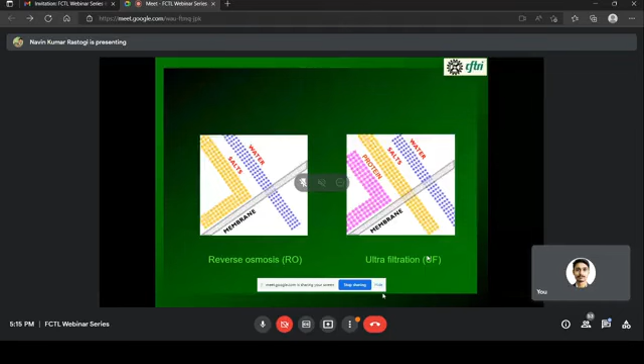Now it is fine, sir. You can go to your presentation mode. Yes. Is that fine? Yes sir. Hello? Now it's fine. Now it is fine. Okay, sir.

So we just restart with that, and we'll say that India is in the forefront in developing the membrane processing technology, and a lot of the work reported has come from India from different laboratories. There are limitations in the membrane processing, and I'll be discussing them now. Initially when membrane processing started, it started with reverse osmosis, ultrafiltration, and microfiltration.

So reverse osmosis, we all see that it is being used for domestic water purification nowadays in India. With the advent of many membrane processing industries, they have come to India and launched several membrane processing units, like RO units, and it has replaced UV or any other processing steps for water purification. And another operation is microfiltration and ultrafiltration.

It is only used for the clarification, whereas RO we only use for the concentration or the purification of the water. How it started is not very far back. We started this membrane processing only in 1950 to 1960, when RO and UF emerged with practical

flux. Earlier, membranes were used either from leather or from the skin of animals, but the flux was the problem. It did not have a significant flux. That's why membranes could not be used anywhere in the chemical or food processing industries.

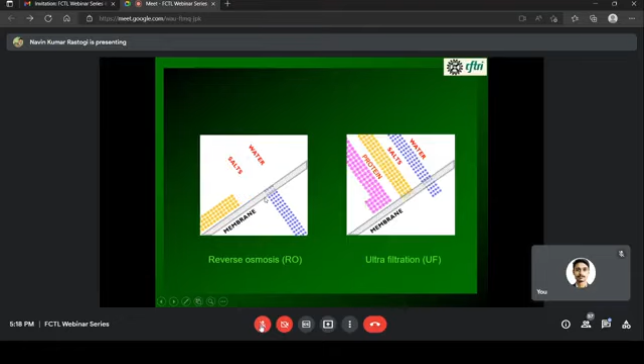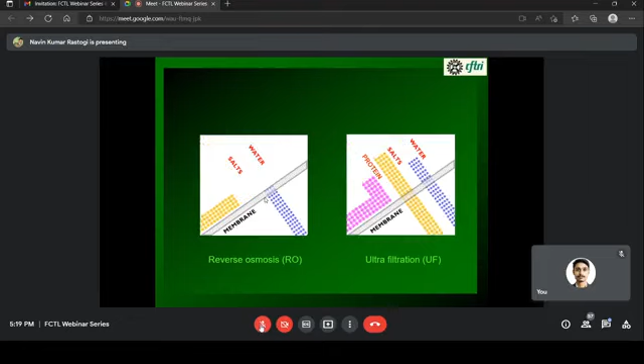And now almost every household has an RO purification system. Even the government and private companies have put up membrane processing systems where we can collect drinking water at a very cheap rate, and that is also membrane processed water.

So what are the advantages of membrane concentration over concentration by evaporation? Concentrating any food product or chemical by evaporation is very well known, where we have to supply heat, the water gets heated, a phase change takes place, and it requires energy. So a lot of energy is required for evaporation.

But in membranes, we do not encounter any phase change. That's why it is called a very low energy consumption process, and since it is not heated, aroma and flavor retention is very high. Because we don't need a boiler for heating, it reduces the capital equipment cost, and we are working with a low temperature, low pressure process.

So we don't require very costly equipment, because it is ambient or low temperature processing in microfiltration, ultrafiltration, or reverse osmosis. And there is no thermal damage, because we are working at ambient temperature. If there is no thermal damage, we have better food product quality.

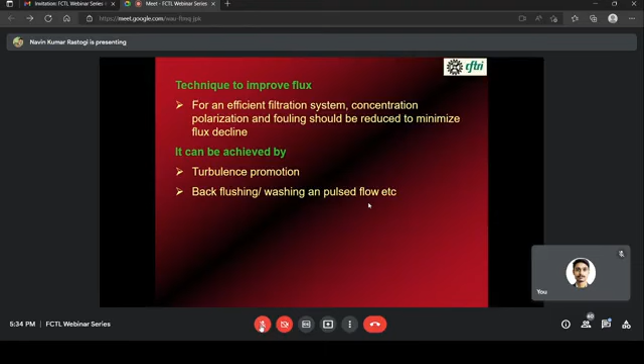Another thing, this is also a very necessary evil. When we are using membranes, we cannot keep them just like that, because they require very rigorous cleaning procedures. How do we check the adequacy of the membrane even after several cycles? There is no way to check whether the membrane has become like the original membrane. What we can do is check the flux. Generally we measure it in LMH. If it is 20 LMH and after cleaning it becomes 20 LMH, it means it is cleaned. If it is less than that, we need to clean it further.

For cleaning, we can use a variety of acids, alkalis, detergents, sanitizers, and combinations of those, and we can de-sludge the foulants accumulated on the membrane system. I'd like to highlight that many detergent makers, including foreign ones, are making detergents for membrane cleaning, which can be used for cleaning the membrane. Very mild to very hard detergents are there, and non-enzymatic to enzymatic based detergents are also available in the market for cleaning membranes.

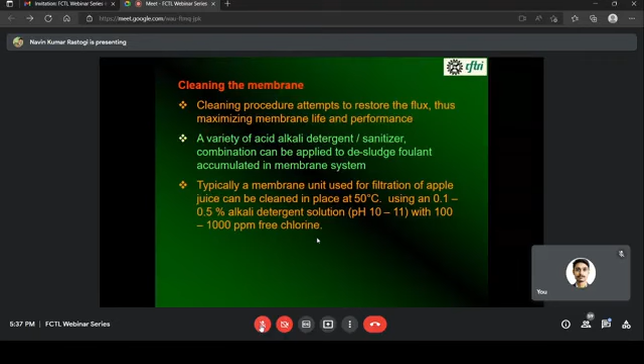So there are different mechanisms given for the membrane processing. It looks like there are pores and the liquid is passing through the porous membrane, but it is not happening like this. When the liquid is coming inside, it will first get dissolved in the membrane material, so that's why we call it solubility. The solvent should be first soluble. When it becomes soluble, then it diffuses out. So these two physical properties, solubility and diffusivity, are very important in membrane processing. That's why the first theory is the solution diffusion theory.

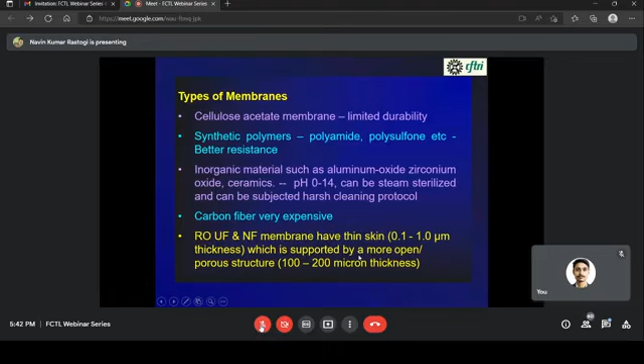So how do we select the membrane here? It is based on the pressure. What is the pressure requirement? What is the temperature requirement? What is the pH of the system? What is the chemical compatibility of the membrane?

And another thing is that for food uses, we have to be very careful whether it is approved for food use, it is durable, available in India, or continuous supply is assured, and the cost has to be less. Because if you look at any membrane processing plant, the cost of the membrane was very high earlier because we were importing the membranes.

Now in India we are making the membranes. That's why it is being used in many operations. And even many of the water purification plants all over the world are based on membranes. Earlier most of the plants were based on evaporating the seawater and recovering the salt, but now most of the plants are based on membranes, RO membranes.

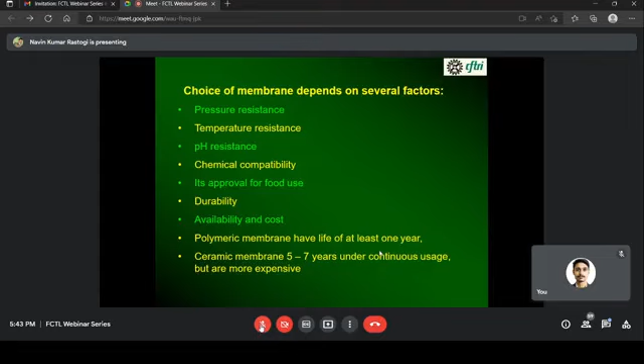And as I just discussed, polymeric membranes have a very short life, like 1 year of continuous use. But if you use ceramic membranes, they will give you a very long life, but they are a little bit expensive. So the cost, safety, and economics, all these aspects have to be looked into when we select the membranes.

So I'm just starting with the basic membrane material, and then we'll go to the novel processing techniques. So far whatever I've discussed, I think everybody knows about it, what membranes are. And there are 4 types of membrane configuration: plate and frame, tubular, spiral wound, and hollow fiber.

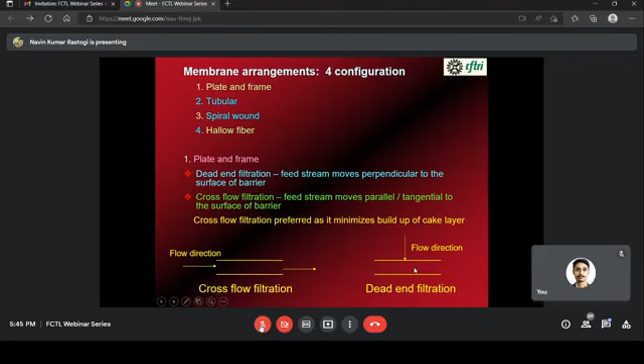So most of the time, if we want to test the membrane performance, we can use the dead end filtration mode, but we will not have very high performance in dead end filtration. We need cross flow filtration because the water flows tangential to the membrane surface. Only then do we get very high flow, a very high rate of mass transfer, and high flux. Here the flux is not very high because it is a dead end type of filtration.

Just to look at how the plate and frame filter looks: it is one membrane, one spacer, one membrane, one spacer. Whatever feed comes here, the permeate passes through the first layer and is collected here, and whatever is retained is the retentate, which can be recycled. So this is one typical example of the plate and frame module.

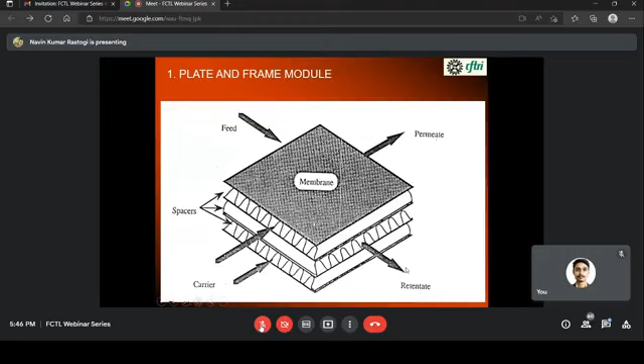Another is the tubular module. In tubular modules, the membranes are fitted in the tubes. Membranes are cast in the tubes, or we have tubular membranes which we can put here, and then the feed solution comes here and circulates, whatever comes out here can be collected as retentate, and the permeate can be collected here.

So in the case of water, our product is the clean water, whereas the unused water will go here. You have seen a lot of water is wasted even in the domestic RO unit, because that is the water we can collect.

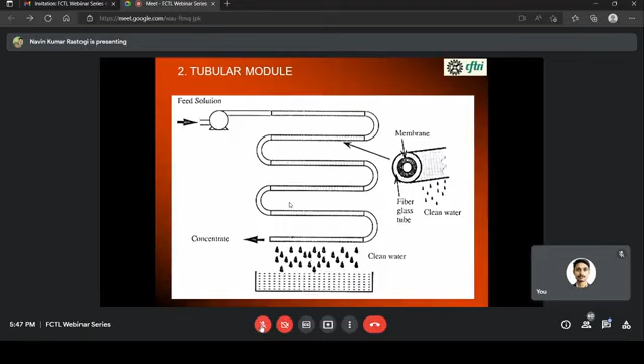Pure water gets collected; impure water, which is very high TDS, gets rejected and goes to the drain. We may use it for other purposes, garden or other things. So the membranes will be here, and then we collect the clean water, and there is a glass fiber, glass tube, and we have several arrangements for the tubular type of membranes. The only concept here is to tell you that the membrane is in the form of a tube, the permeate is collected, and then the retentate is recirculated or goes to the drain.

Another configuration is the spiral wound membrane, because generally when we make membranes, we make them in the form of a sheet, and when we make them in the form of a sheet, how do we test the membrane? We cannot make the tubes, or we cannot make the flat plate here. So what we can do is roll it like a calendar. The membranes, whatever we have made, we can roll like a calendar,

and we put a spacer in between so that there is a space between the two membrane surfaces. The feed water goes here, and then we can collect the retentate; the concentrate water comes on the other side, and tangentially we collect the permeate here. The permeate is our product sometimes. And if it is fruit juice concentration, the concentrate is our product, whereas the water is very pure water. It can be used for drinking purposes or anything, which we collect from the fruit juices.

So this is the third type of configuration. Another type of configuration is the hollow fiber membranes. Hollow fiber membranes are just like the thickness of a hair, and if you look at the hole here, it is 0.1 to 1 millimeter. It's a skin thickness here. The feed goes inside here, permeate comes out, and then retentate is also rejected here. It gives a very high surface area in a very small volume. So this is also a very good configuration.

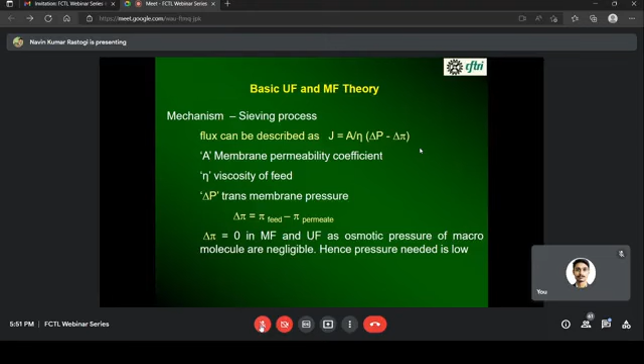I have just told you about the different mechanisms: solution diffusion, molecular sieve, vapor pressure. Some people think it is solution diffusion: the solvent goes and diffuses into the membrane material, solubilizes, and then diffuses out to the permeate side. So this is one theory, one school of thought. Another is that there are pores in the membranes which block the passage of the solute, not the solvent.

It is sometimes difficult to convince. Sometimes we have to borrow some of the logic from the different schools of thought, because when we do the modeling, we need to have all the things, whether it is a pore flow mechanism, a solution diffusion mechanism, or a combination of these, or some people think it is vapor pressure, like there are fine capillaries in the membrane which prevent the passage of the solvent, but distillation can take place from low to high concentration.

So people think that the membrane has capillaries which will not allow the passage of the solvent, but it can go when it gets distilled because of the difference in the concentrations. And the preferential sorption: at the membrane surface, the solvent is preferentially adsorbed, or the solute is preferentially adsorbed. So this is also one of the schools of thought here.

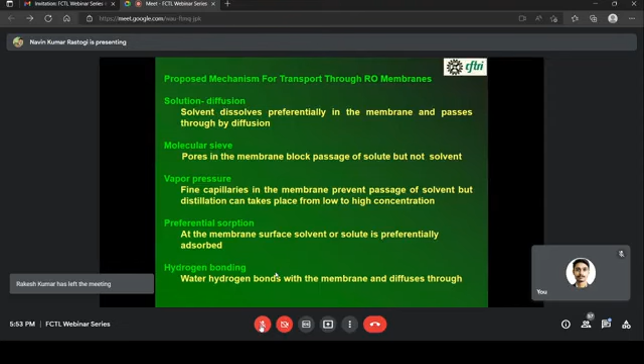All the 5 mechanisms play an important role in different scenarios, but generally the first 2, pore flow and solution diffusion, have a lot of significance, and most of the modeling in membranes has been done based on these phenomena. So what are the different characteristics of the membrane? We look at this now.

If you go and buy a water purification system, and I'm not advertising for anything, there are so many, Kent and the like, coming. What should be our criteria? What should we ask? It should have a very high water permeability and high solute rejection. So 95% of the solute should be rejected. Minerals should be rejected, because suppose we are getting very high TDS water, very hard water, it should reject around 90 to 95% of the solutes. Then only it is fit for consumption.

Another thing we look for is the shelf life of the membrane. If we buy now, can we use it uninterruptedly for at least 3 years? And after 3 years, the cost of changing membranes and filters is around 50% of the cost of the equipment. So those are the parameters we generally think about before we buy any membrane unit, even for the house or our pilot plant or anywhere in the industry.

And ultra thin RO membranes, what are the membranes they are giving to us? Because Ion Exchange has opened up their unit in India, I came to know that's why membrane processing RO has become cheaper in India. Otherwise, when we were importing this, it used to be very high. And these membranes are only cellulose acetate, mixed cellulose esters, polyamide, polyurethanes. These are just polymers.

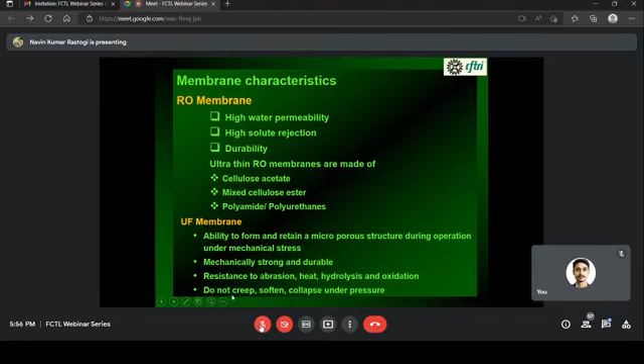And it should be resistant to abrasion, heat, hydrolysis, oxidation. These things generally come with the membrane when you buy it, and it should not creep, soften, or collapse under pressure. It should be stable. What are the different applications in food processing? This is not an exhaustive list. Any of you can think of a number of applications. I'm just giving you examples.

We can concentrate and purify fruit juices prior to evaporation. Generally, evaporating single strength fruit juice is not economical, because when we extract it, it is 10 degree Brix. It has a lot of water, and if we send it for evaporation, it requires a lot of energy. So we can concentrate the juices, and only then take them to further processing. For concentration, we can use it for starch, citric acid, egg white, milk, coffee, syrups, natural extracts, flavors.

You name any process, we will be able to use the membranes. The best example for this is that it can clarify unwanted suspended particles. It can clear them from wine and beer, and it gives you crystal clear beverages. And the fractionation of fermented liquor: suppose we are producing some fermented liquor like wine, we can fractionate it, keep whatever is required, and let other things pass through.

Another thing we are emphasizing is demineralizing and purifying water. Where a very high quantity of minerals is present, it can be demineralized, and then we can purify the water using the membranes. It has already come into place, and even the government has put up units. I don't know about the other states, but in Karnataka, Tata and so many private companies have put them up; we can take our can and collect 25 liters of drinking water for only 5 rupees.

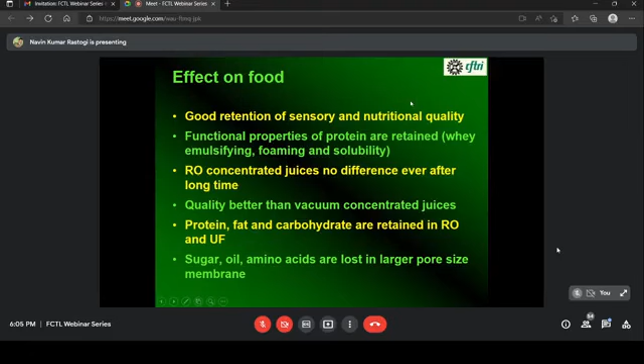Sir, I think you got muted. Sorry for that. Please unmute, Rastogi ji, unmute yourself. You are muted. There is some problem.

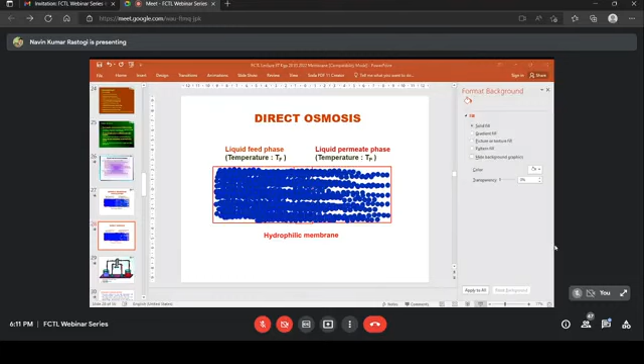Yes. Now it is moving at least. Osmotic membrane distillation, we are seeing. Sir, I think you are not audible. You are muted again. Sir, I think there is some bandwidth problem. If you close your video.

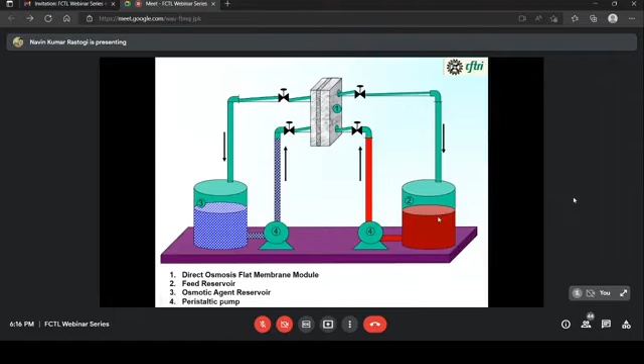So if you look at how it works here, on this side there is a feed, and the feed goes here. This is a membrane. The feed goes here, comes back, and gets concentrated. Whereas this is a draw solution, like a salt solution, which goes here, comes here and then returns back. The mass transfer takes place across the membrane. Water flux is maintained here. Water gets transferred. This draw solution or osmotic solution will get diluted, whereas our product of interest will get concentrated.

So in this way, we can circulate the product and achieve around 60 to 70% concentration. We can do it as long as we can circulate the liquid, because at a higher concentration viscosity increases, then we cannot go higher, and we stop.

We have done it for several liquid foods like pineapple juice, sugarcane juice, coconut water, tender coconut water. We have several patents on concentrating tender coconut water by this method, and then it can be redissolved, like 1 teaspoon of tender coconut water concentrate can be dissolved back into 1 glass of water, and it still gives a taste of the fresh tender coconut water.

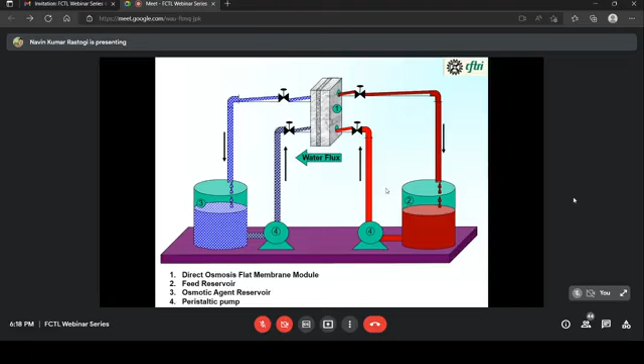So this technique is known as forward osmosis, because otherwise, if we are not concentrating, we need to transport a lot of water, and unnecessarily it costs us money. So it is better we remove the water, and at the point of consumption we can reconstitute it and bring it to the same concentration. Some reverse salt transfer will be there. That can be avoided by having different strategies.

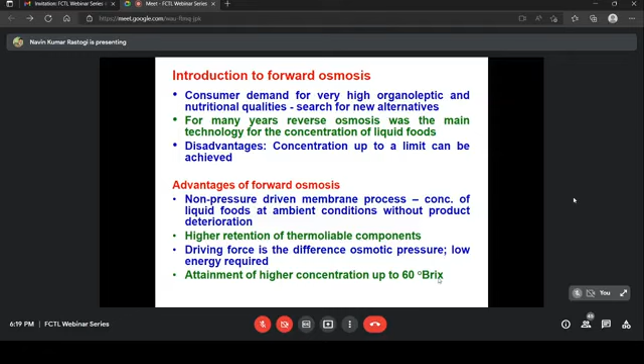We can have a mixture of salt and sugars, or we can have different draw solutions. People have worked on different draw solutions where we can restrict the reverse salt concentration, but the product can be concentrated up to 60° Brix, and if you concentrate anything above 60° Brix, it does not require any preservation methods. Maybe we can store it at a chill temperature with a little addition of sugar, but it is also not required once we achieve more than 60° Brix.

So how does forward osmosis work? We have seen the concept here. Just look at here, this is a simple process of osmosis. If we have a concentrated feed and we contact it with water, water will slowly start moving to the concentrated solution. Second, this is called reverse osmosis. If you apply pressure, water from the feed will start moving to the water side, and the product will get concentrated. This is known as reverse osmosis.

What we are doing here is called forward osmosis. We have a feed here, and we have a very concentrated solution like 6 molar NaCl solution. So what will happen? Water will start moving under the influence of osmotic pressure. No pressure or temperature is needed. Only osmotic pressure transports the water from the feed side to the draw solution, and then the feed gets concentrated, even up to 60° Brix or more. It is only a matter of circulating in the tube, and how we circulate it.

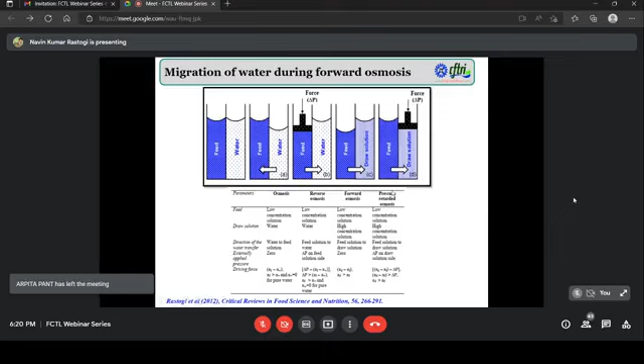And one more concept is here. If we are circulating and we restrict it here, we do not allow the draw solution to come here, it will create some kind of pressure. This phenomenon is known as pressure retarded osmosis. It can even be used for the generation of electricity. We are restricting our discussion to forward osmosis, but this is another phenomenon which can be used.

So what kind of membranes are these? The membranes used for forward osmosis are generally not available in our country, but people can make them, and these procedures are available. The only thing is it may give us a lower flow rate. I can give you the specification, and you can think of how to make it. It is generally less than 50 microns. These are membranes embedded in polymers, but the total thickness will be less than 50 microns.

Some people are making them, even in India; some research institutes are making them and even publishing the results. But some membranes are available outside. Forward osmosis membranes are available, and people are buying them, using them, doing experiments and concentrating liquids. The only thing is we still have to bring it up to commercial scale operation.

If you look at how this is happening, this is the mechanism, because we don't leave anything without the mechanism. So this is the forward osmosis membrane. As I was discussing, membranes have to be supported with a support layer like this, either on this side or on that side. If I have only the membrane, it is something like this. The driving force is pi d minus pi f: pi d is the osmotic pressure on the draw solution side, and pi f is the feed side. But it is difficult for this membrane to withstand, because there is no support here.

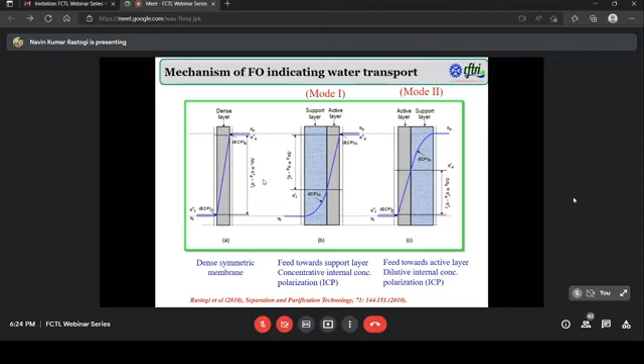So please look at this. These concentration polarizations were not at all discussed in the literature, and for the first time they were made available by our work here, and now almost everybody is using them.

Another thing here: the feed will not have only a single molecular weight compound. It may have a low molecular weight compound plus a high molecular weight compound. A low molecular weight compound can cross through the boundary, the support layer, and the actual membrane processing will start from this point onwards. A high molecular weight compound cannot go inside; it will be retained on the surface. Only the low molecular weight compounds can go inside, and then the migration of the water will start.

These things have been clarified and published widely in international journals, and our group took a lead in explaining concentration polarization as well as the mechanism involved with high and low molecular weight compounds. We have shown that if you have a mixture, mode 2, where the feed is towards the active layer and the osmotic agent is toward the support layer, was found to be the best combination, giving the highest flow rate.

How much time do I have? Can I continue for some more time? Yes, please continue. Please continue.

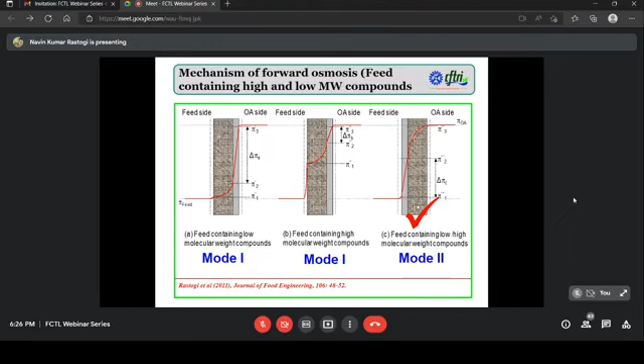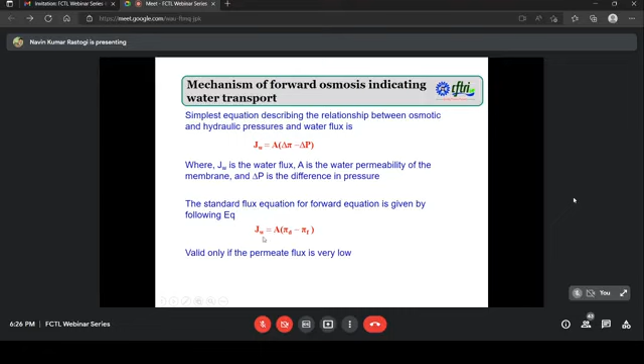Okay. So again, this is the same equation for membrane processing. Earlier we were talking about A into delta pi, and now delta P may not be so significant, but delta pi is very significant. Delta pi is the difference in the osmotic pressure of the draw solution and the feed. The draw solution is selected so that it has a very high osmotic pressure compared to the feed solution. We use the same equation to calculate the flux here, and A is the permeability.

Just a revision of how it is happening: the feed is going here, concentrating here, and coming back, leaving the water on the other side. On this side the draw solution could be NaCl solution, calcium chloride solution, any solution having high osmotic pressure, newer solutions, inorganic solutions, and then our liquid feed can be concentrated.

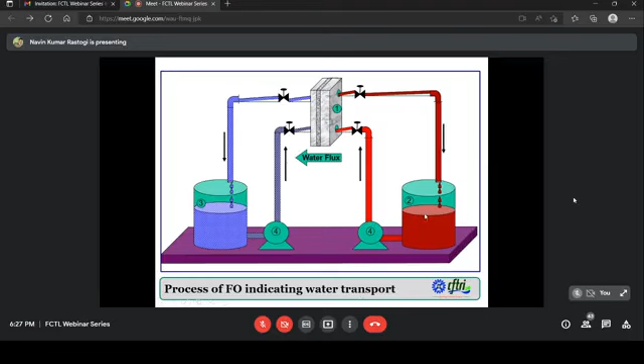And this is the experimental setup. This is the membrane setup we have, with both sides. We are concentrating the anthocyanin from the kokum fruit, and you can see we have an NaCl solution. It is being concentrated, and there's no transfer of the color.

This is absolutely transparent, whereas this is very red here. So there is no transfer of the anthocyanin taking place here, and then we can monitor the flux, concentration, Brix, everything we can monitor, and how much we can concentrate. And this is made by us only. We have made it in our laboratory. We have done it with different materials.

Our main focus was on the concentration of the natural colorants. Another was the fruit juices, because when we extract both, they will have a very low concentration, and there is no existing technique which can concentrate the natural colorant, because the moment you heat the anthocyanin, there will be a change in the anthocyanin composition, and then it will become brown, and then we cannot have this.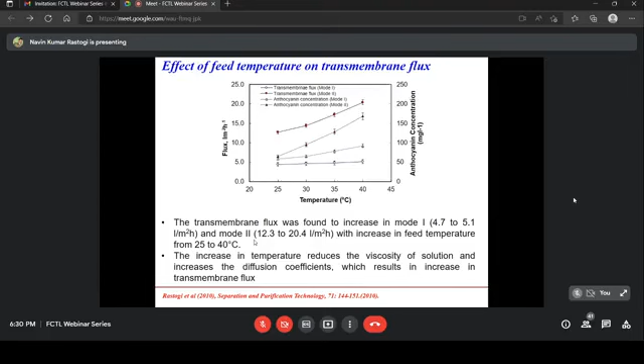And mode 2 was found to be the best one. Earlier also we have shown mode 2 is where the feed is towards the active layer. That was found to be the best one. And the osmotic agent flow rate and feed flow rate we can also change. Here we did not find a significant increase. The flow rate does not change much the flux or the anthocyanin concentration.

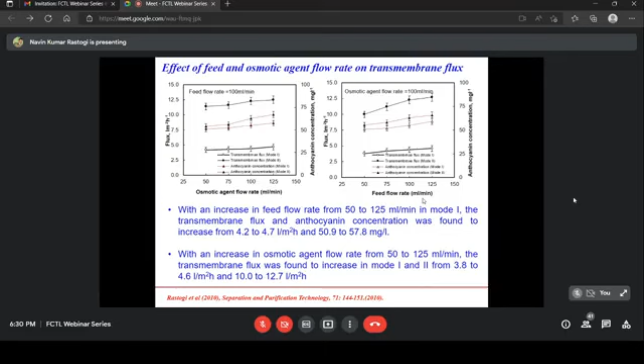If you look at the overall concentration, we have put this. Kokum is the fruit. It is very much used in some parts of the country, in the Western Ghats, as an acidulant in many food preparations, and it is a good colorant with a cooling effect, and a lot of it is used in cosmetics as well. When we extracted it, it was only 2 degree Brix, and we could concentrate it up to 52 degree Brix in only 15 to 16 hours.

Of course, when we increase the concentration, flux is going to decrease, and when the flux decreases, we can have a strategy to clean the membrane, put it back again, and then get the same concentration. Anthocyanin was concentrated with a 71-fold enhancement. And there was no change. When we diluted it back, we got the same anthocyanin, which is not possible any other way. Thermal treatment will spoil the anthocyanin content because it leads to the production of brown pigment.

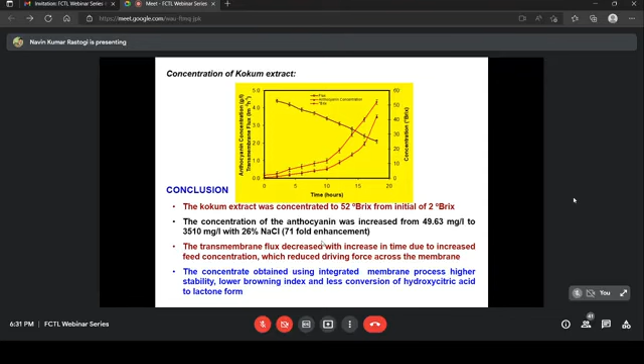We compared: this was the fresh extract of kokum. This is the forward osmosis concentrated one. And we thought, let us dilute it and see whether there is any change. It was found that there was almost absolutely no change. The fresh extract and the reconstituted extract had almost 2 degree Brix, and titratable acidity was a little bit reduced, but it was okay. Color parameters, density, viscosity were almost the same. So there was no change because of the forward osmosis.

So we were excited with the work we did. We wanted to take our work further, and there is a problem with the concentration of betalains, like from beetroot. So then we concentrated betalains. We stopped after 6 hours and then reconcentrated again. If you see here, a 57-fold concentration of betalains was obtained. Otherwise, if you use any thermal processing, it will degrade. It is not possible to concentrate up to that level, and it will produce a brown pigment.

Same way, we experimented again with that result here. We concentrated the pineapple juice because we have seen after the second cycle also it is reducing the flux. Then we have gone up to 3 cycles, and then we can concentrate up to 12-fold. We can concentrate the pineapple juice, and whenever we want our juice, we can dilute it and consume it.

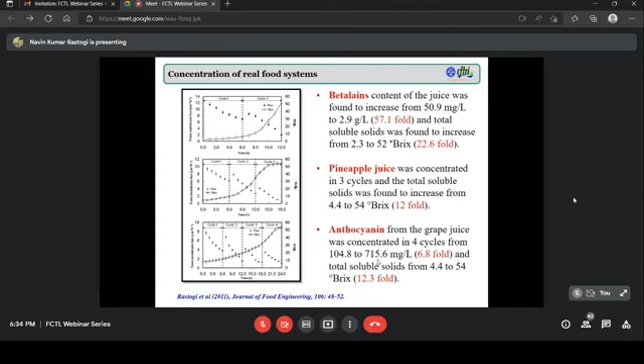So again, beetroot juice was concentrated. Just to give you an overall view of this, we have concentrated using forward osmosis and compared with thermal processing as well. What are the changes that take place in thermal processing and what are the changes that take place in forward osmosis. Just to give you a gist of it, we could concentrate by forward osmosis up to around 12 times, and there was a flux decrease because as the concentration increases, flux will decrease, and there was reverse salt migration also taking place.

So we could address that by having a combined draw solution. Like we can have a combination of draw solutions like sugar and salt mixed together, and different combinations we can think of. We can have magnetic nanoparticles as a draw solution, or carbon fibers, or different things are available just to avoid that.

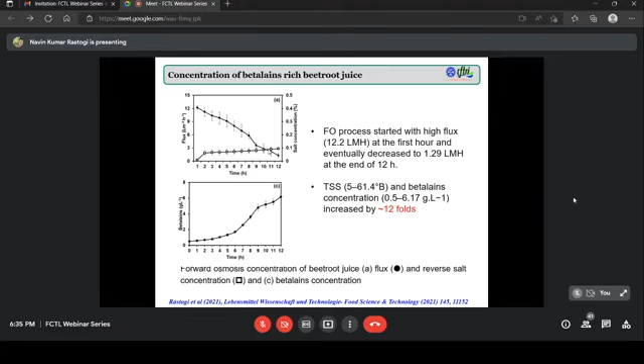And FO concentrated, we have extracted the color from rose petals, and rose also has anthocyanin, and it is very difficult. The moment you heat the rose, the color of the rose will go and it will not be useful. And we have shown that the rose colorant will have an application in food processing, because it can give a very good red color, and whatever red color it gives, it is very stable.

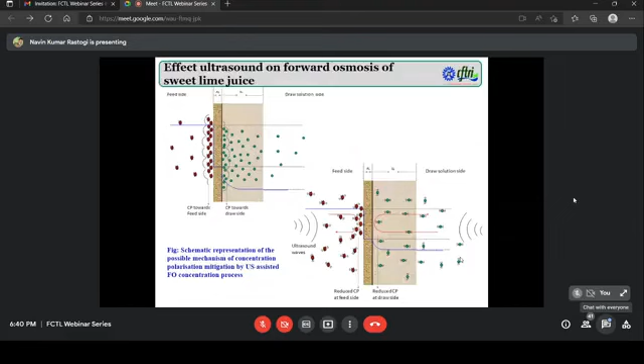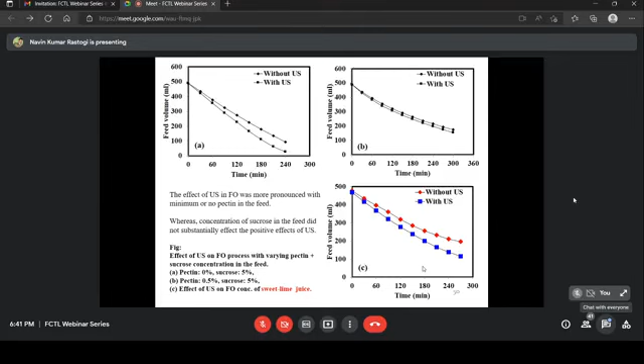And this was the first approach showing that ultrasound can influence the flux in membrane processing. After that, a lot of papers have come, even in ultrafiltration and reverse osmosis, and most of the genesis of this is the paper which we published. The only thing is, we are still finding a solution for how to increase the flux if the fruit has a higher pectin content. We have shown it with sweet lime juice, where pectin was not very high, and the first two are the model systems.

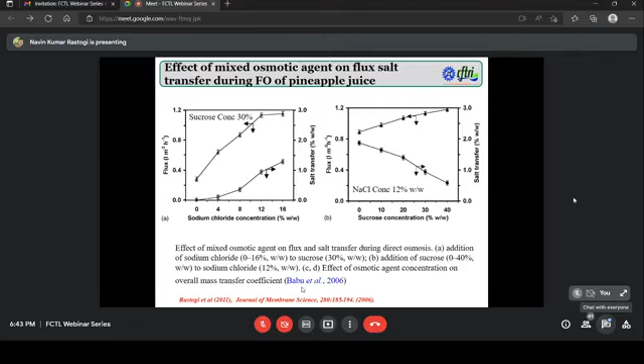If you get the taste of the salt, we have two strategies. We can have sodium chloride as a draw solution, or sucrose as a draw solution. So we can mix these two solutions so that we can minimize the salt transfer while maintaining the same flux. You can find this paper published in the Journal of Membrane Science. For the first time, it was shown that we can have a mixture of two osmotic solutes while reducing the salt uptake, or reverse salt transfer.

We started working with different colorants obtained from different flowers. There is a big mission project going on at CSIR, and we are a part of it. We are recovering different bioactive compounds from different colored flowers, extracting blue, red, and different colors, which will have applications in food processing.

Another very interesting application, probably this is the last one. Okay, so thanks for your patience. And here, this is a very important application. We can make a bag out of the forward osmosis membranes, and we have put some kind of sugars and some other things inside. And what will happen here, see, when people like the army, the defense forces, are working in terrain areas, difficult regions, they do not have drinking water. So suppose we have this kind of bag, and if they have dirty water, not potable water, we can hang this bag in that water.

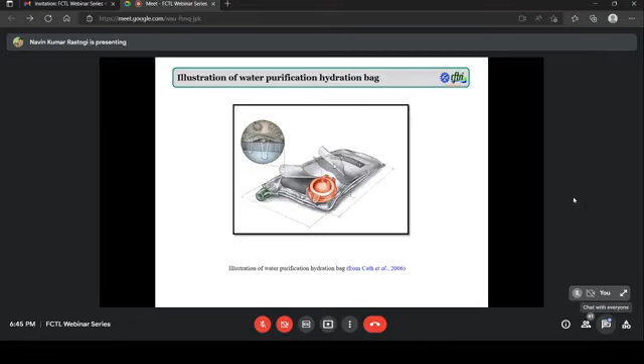So what will happen? This bag is made of forward osmosis membrane. It will suck the water inside. When it sucks the water, this bag will be filled with water, and we have already added some nutrients inside, like vitamin C, some sucrose, some glucose, and it makes a very tasty drink inside. Even the soldiers at different locations can have this kind of water, and it will be like a fruit juice for them. And we can add some dried fruit juices, and when there is no water, we can generate water.

Where do we get these kinds of membranes? Formation of the membranes. The membrane institutes, people working with the formation of membranes, like casting of membranes, come into the picture. And when this is solved, I think the sky is the limit for India in this area, because we have cleared almost all the mechanisms. Everything is done in our country.

And another thing is that we need to have draw solutions. Suppose we have a magnetic draw solution containing iron particles. So we can have iron magnetic particles in the draw solution, and just add a magnet, and all the draw solution will get cleared, because the magnet will attract the iron particles. So this requires research in three or four areas, like membrane making, draw solutions, and different applications.